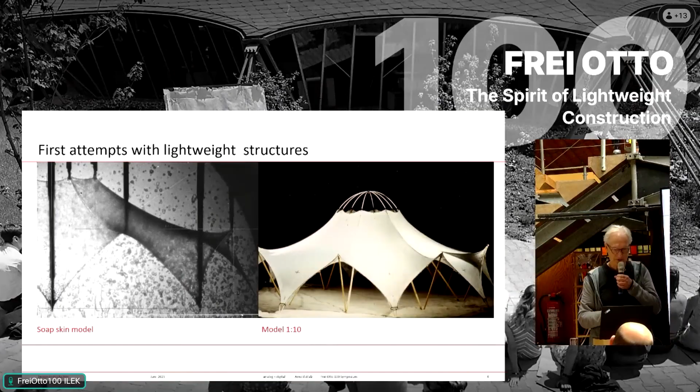The only tent project I realized was when we once made it happen to be allowed to do a party in the Schlossgarten. So I did this. They are just done from polyethylene, and I put them together with an iron and with the help of silicone paper, because the silicone paper holds the membrane as it shrinks while you put the heat on top. You can do that in 2 days or so, and put some cables in and some sticks, and it works.

And the next thing is, being influenced by Frei Otto, this institute, and all these new forms, apart from the rectangular stuff we did, we as students started playing around with this kind of world. On the left side, I made some pavilions for this youth culture week we had at that time. So there's this dome with just some sticks from the nearby forest and a piece of fabric from the theater that was donated.

And suddenly we found out, well, we forgot to do something for the kids, so we made a children's cafe. This is this little thing in the back with rebars and paper and scissors to cut the windows out and so on. Then occasionally, we did that 3 times.

We had this seminar building with ice. It was organized by Marcel Kalberer and the Institute of Modeling and Drawing and so on. I forgot the name of the professor. So we went once to Poland and twice to Switzerland to build with ice.

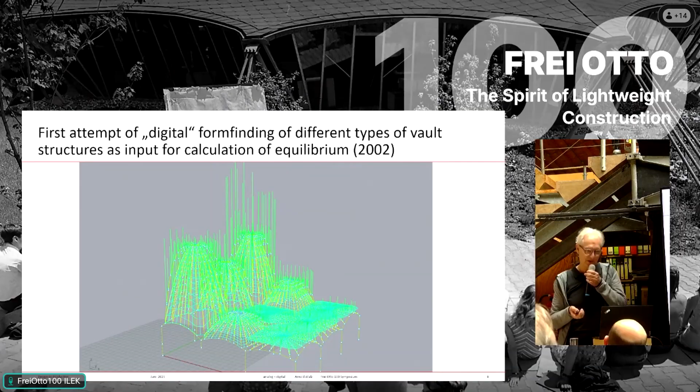My idea was to do this kind of reconstruction for the whole church, because then I would have the chance to simulate different structural things until I would meet the original form, which was shown in the photographs. But unfortunately, Rainer Gräfe in Zurich decided to do that in an analog way, so I stopped that project.

This I wanted to show because, when you have teachers, at some point you think, I have to overcome that, what he does. Of course, you can't overcome Frei, but anyway...

Together with Victor Wilmer, we did this membrane, and the point is that it's only prestressed in one direction. There was this statement that a membrane should always be prestressed in two directions, but there was no program to do the cutting patterns and everything, so I had to do a lot of programming work to generate all these cutting patterns, because the thread has always to go exactly in the direction of the prestress.

This was at the International Automobile Exhibition in Frankfurt, designed by Bernhard Franken. I think it's about 80 meters long, and the distance between two of these things is 8 meters. It worked.

Then I started being invited by these architects, and this time it's the Renzo Piano stuff, where I generated the form from the Cologne building and the Klee Center. The last one, I think it's a very nice project, but you hardly see it because it's inside a block and hardly seen from outside - this Foundation Pathé thing in Paris.

I think a very big challenge was when I was talking to Ben van Berkel and Tobias Wallisser, and I had the chance to work on the Mercedes Museum, which ended up with me basically programming the whole building, all the concrete geometry and the facade. In the end we worked together with Züblin, and we generated the cutting patterns for all these concrete forming sheets for the double curved surfaces of the interior spaces.

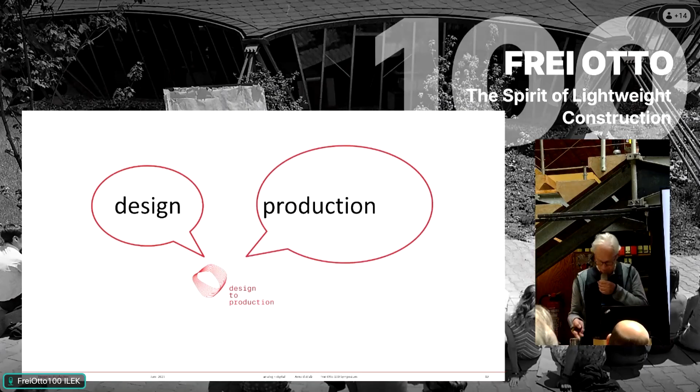As well as in the opposite direction—with our experience from production issues, we can inform planners to consider certain things in order to not run into unnecessary problems in the end. So we speak design and we speak production, and we communicate to both sides on eye level, or translate simultaneously.

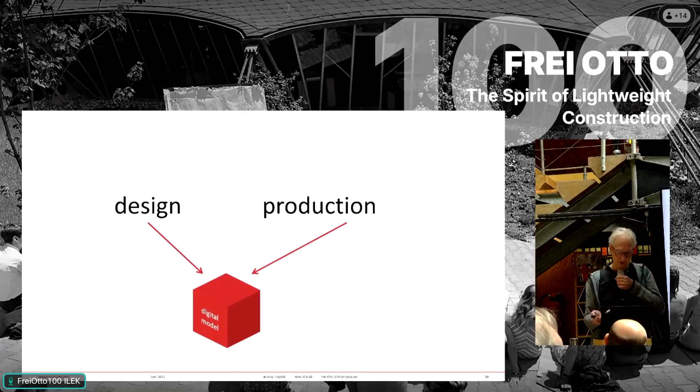Our work is based on a digital model, and we like to sit between all the chairs, so to speak. There we can consolidate and store the information gathered from all involved parties, and then generate and extract information for all involved parties, if you like.

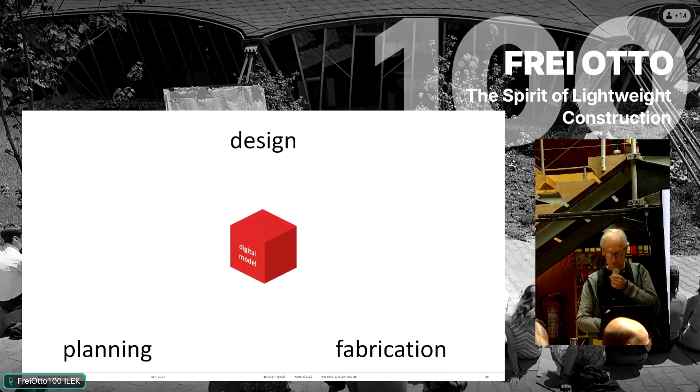In parallel to gradually building up the digital model needed for production, we try to add some more value to the process.

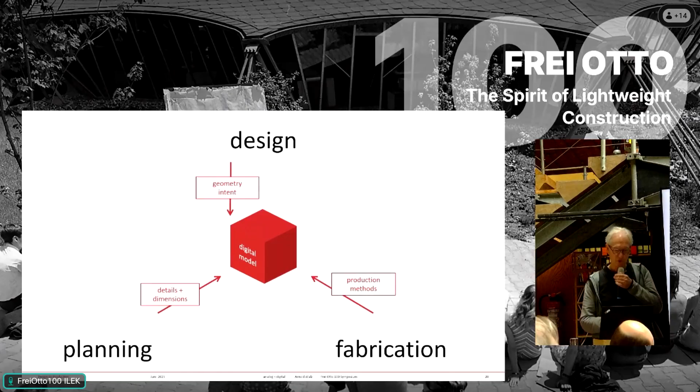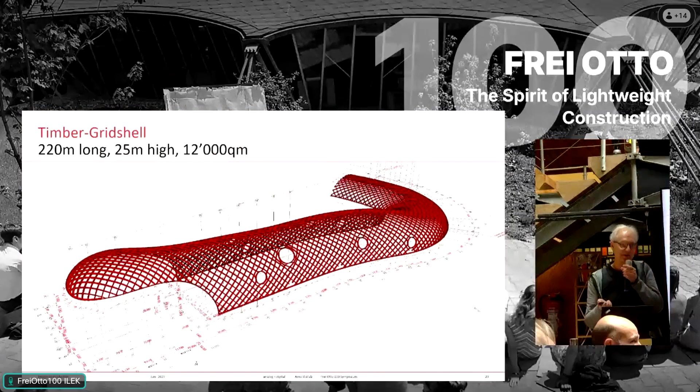I chose this project because it's a grid shell, but as you see, it's very different from what Frei Otto did—the cross sections of these beams might be 50 to 100 times larger than the members in his work. It's a building 220 meters long and 25 meters high. That's our way of working.

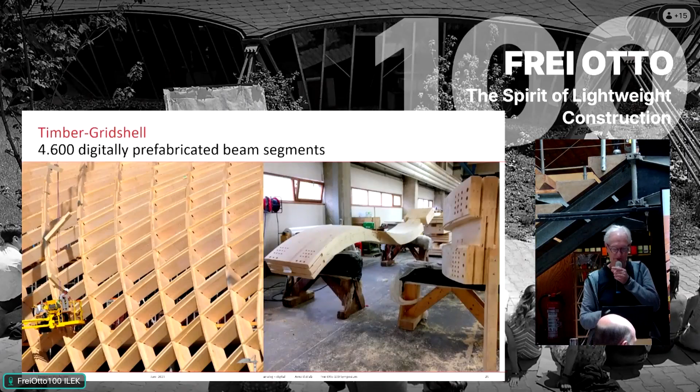We have a very simple model: a grid, a surface which defines the shape, and the axis of the beams. From that we generate 4,600 digital beam segments, which can be produced digitally. As you can see here, it was produced by Blumer Lehmann in Switzerland. Then we have 2,800 individual facade elements of 10 different types.

They're opaque, ETFE, glass, photovoltaic, and operable—open elements. We had to design special ways to solve the problem of putting these together on a curved surface where the angle on one side is different than on the other. This is how it looks so that it works.

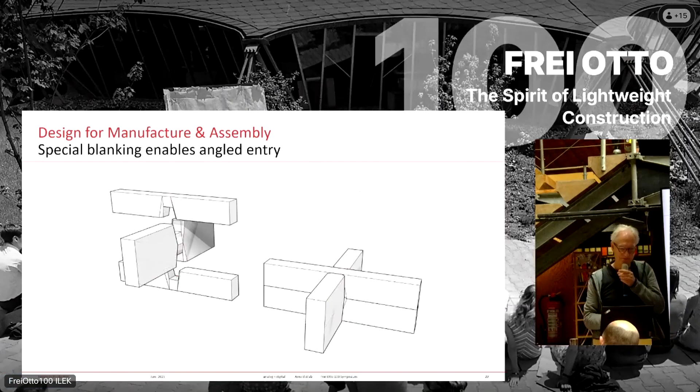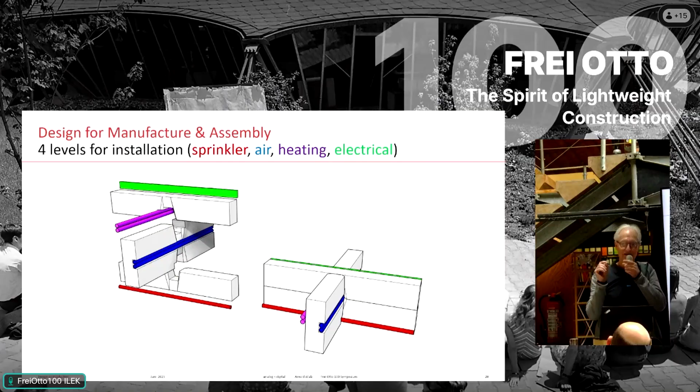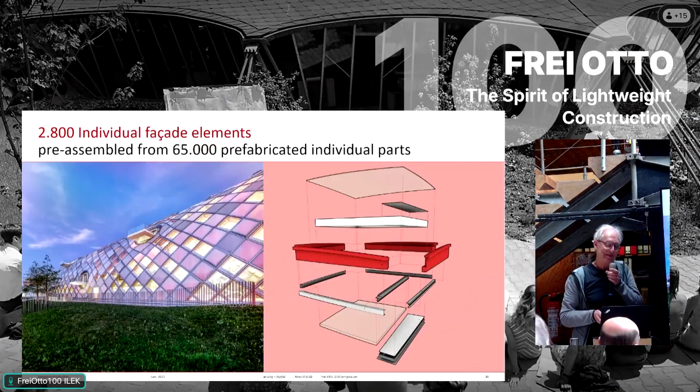We had to make sure all the installation finds its place, so everything is arranged—when people come to the site, drilling machines, saws and cutting machines were not allowed. This is how it's integrated. We generated 2,800 individual facade elements, pre-assembled from 65,000 individual parts. And that's what comes out.

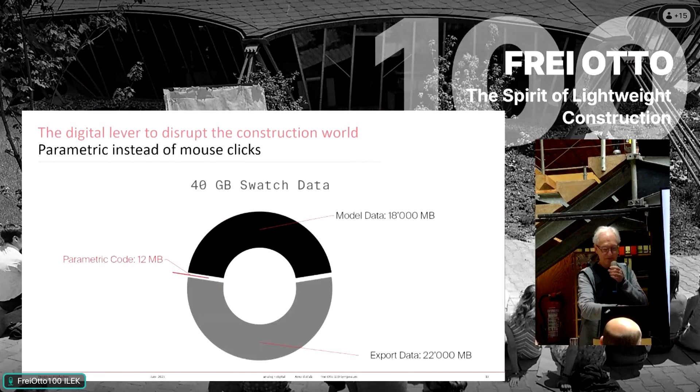Let's rush through the rest. We automatically create detailed models from abstract models—this is what we need. The minimum is the parametric code, and from that code you can generate all this other data and share it with people.

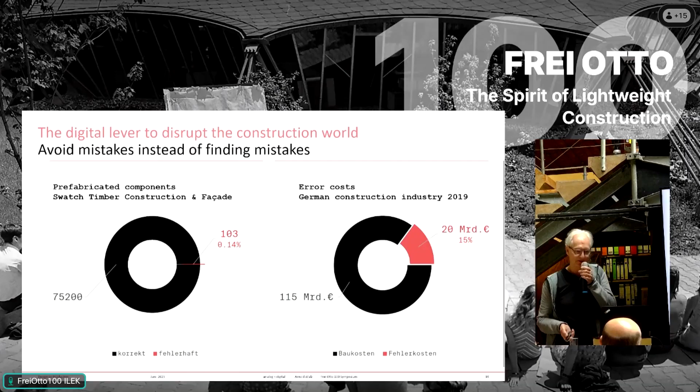A very big thing is to avoid mistakes instead of trying to find mistakes. Our error rate is 0.14%. The German construction industry had 15% in 2019; meanwhile it's, I think, 12 or so—still much too high.

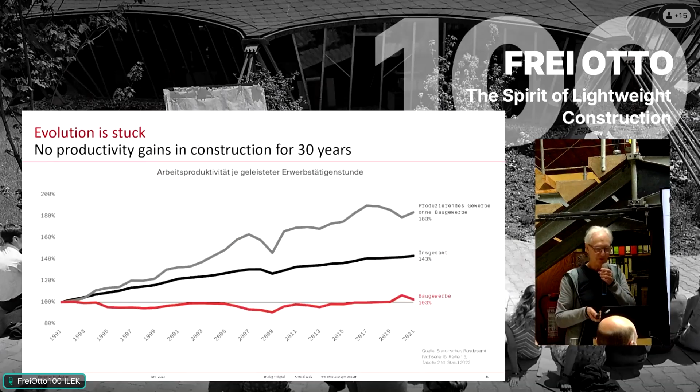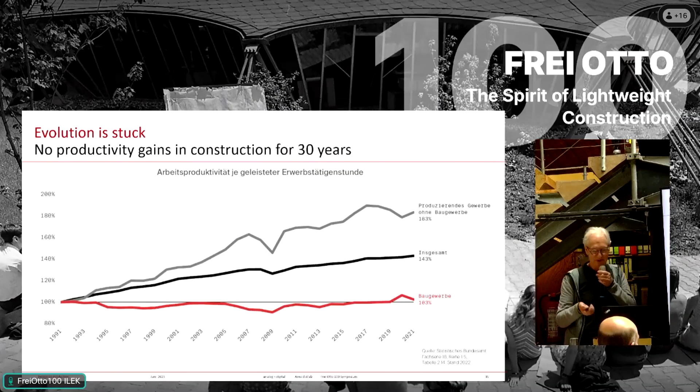This is a picture we've shown for 30 years. It shows that work productivity in the construction industry hasn't risen in that time, while the rest of industry has raised their productivity around 80% on average.

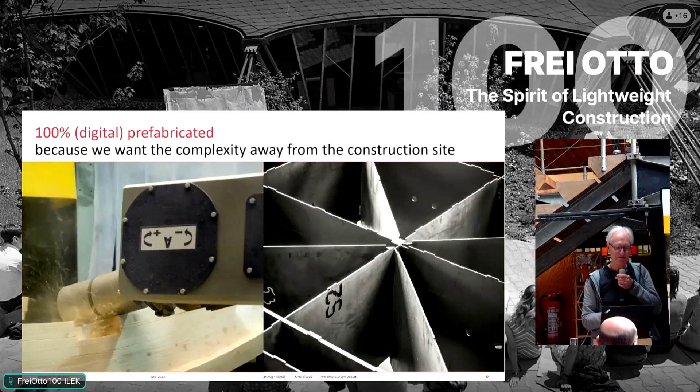I'll rush through this. One thing I want to show—remember this detail? It's the interior structure of this facade element, steel pieces. We not only did the design for that—I didn't design the facade, but I found a way to model this—we also do production design. We really tell the company this is how it has to be done, and if they wouldn't do it, I would be out of the project.

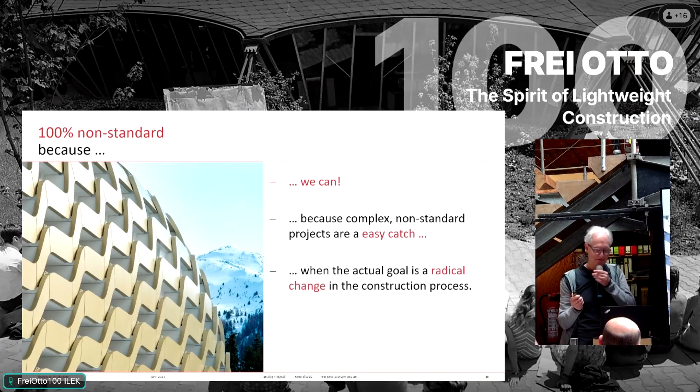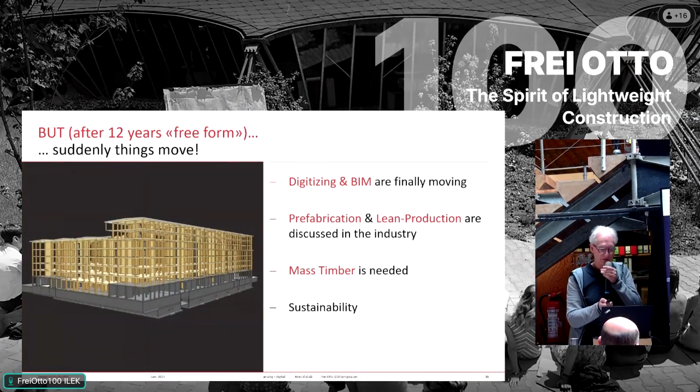For the rest—since 12 years we've tried to concentrate on normal buildings, and we're meanwhile able to automatically generate detailed wall elements for production, which we did for a whole building in Switzerland, in Winterthur.

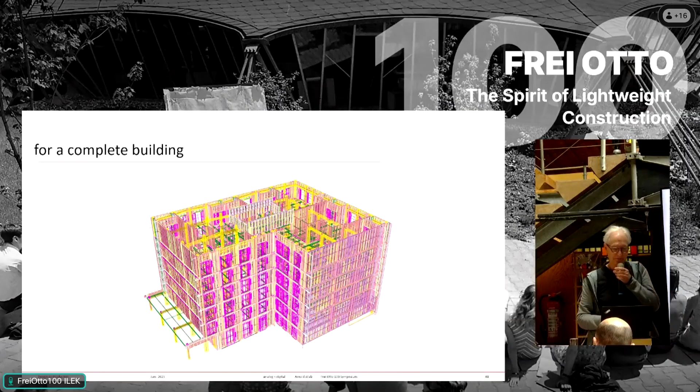And this is my hobby—the last thing I'm working on: a digital planning-to-production process where we can put in all the experience we've made with all our projects. Thank you very much.